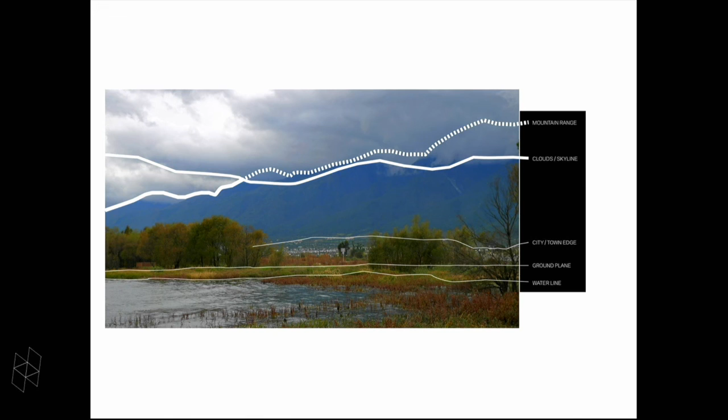So our form is definitely inspired by nature. You always see a lot of beautiful mountain, lake, wetland landscape—it's really hard to get a single straight line, except where mountain and water meet, that's the horizon line, right? So even their buildings are small scale and never have a straight line. This kind of thing starts to generate our design.

Definitely it's not a big idea. From this diagram, you can clearly know what we really want to achieve. The theater is only part of this program.

For normal design, since this is a theater, normally people make almost the entire building theater except the lobby. But we leave maybe 60%, even more, providing outdoor space, amphitheater, plaza.

This is the Kong idea. We give the flexibility, we give the space, which sounds like nothing, but it turns out to play a very important role for this architecture. We also go back to very primitive typologies, like transparent space, nest or cave, for the performance space.

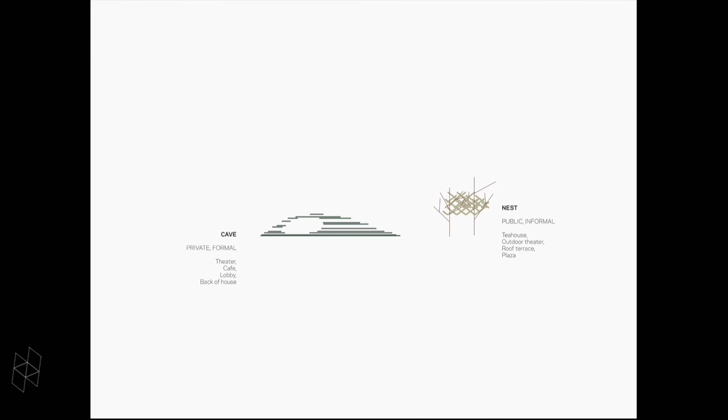We also create a very interesting transformation, both of nature and the cave-nest idea, into the roofscape. We create a big canopy, you can see. The local weather is so beautiful.

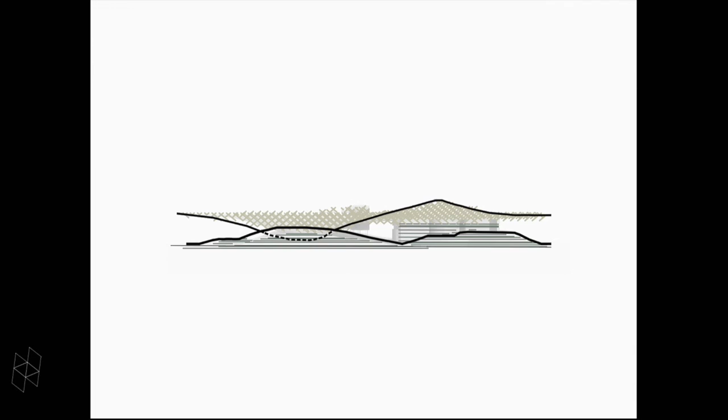This is a highland. It's never too hot in summer, never cold in winter. So most people stay outdoor. This perfect climate actually generates the people's lifestyle, the locals' life.

So you can see the big roof, but this roof somehow works both ways. First, providing shading in summer, protecting from the rain so people can stay here. Secondly, there's a huge tension between the lower ground and the sky.

So even people can unconsciously walk from here to the roof. It just makes landscape and architecture really integrate, even the performance—this indoor space with an open skylight, a big skylight.

That's not what a traditional theater space is supposed to do, but we want to give something experimental. Sometimes if there's no performance inside, it can be very interesting—you're going to look at the sky, mountain, the cloud, etc.

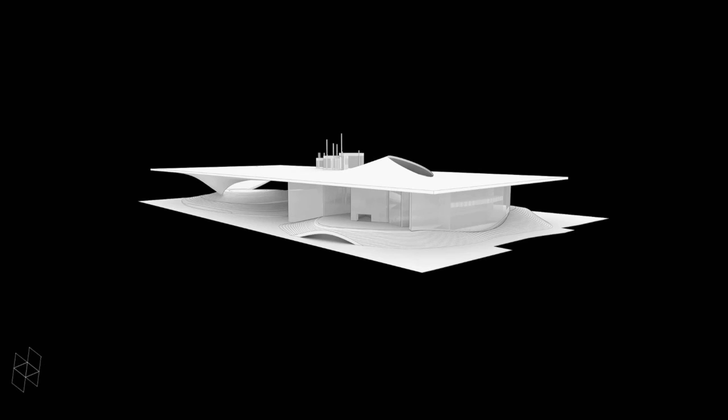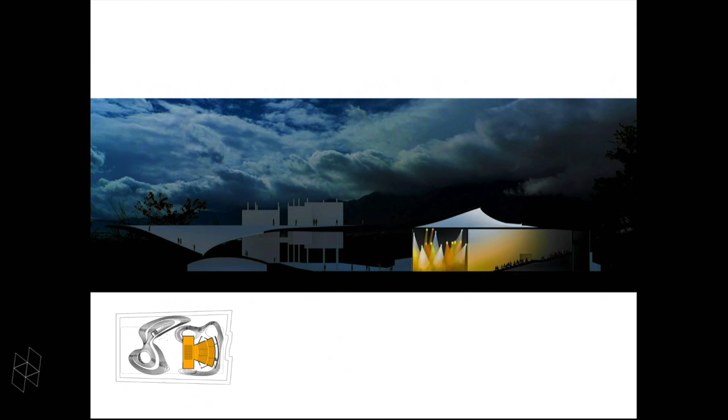So this model shows the two volumes, right? One is attached to the landscape, at ground level. One pops out, more like a mountain. These ideas try to create a lot of interesting tension between the buildings.

This is a normal theater, right? If we don't have the rest of the space, that's perfect for the performance. Definitely we're providing another possibility.

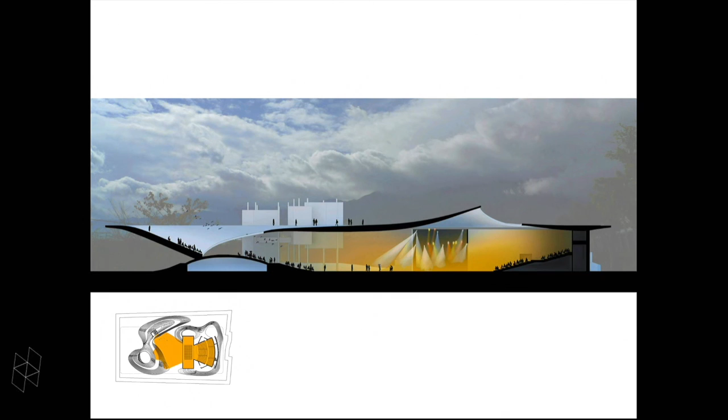The stage, the recent stage, is located on this side. We can also share it, turn it another way. Definitely you can separate it. This is exactly what we really want to achieve—bringing the performance to the outdoor, to the Kong space. This space exactly translates the meaning, right? I just mentioned the Tao, and it's actually really meaningful.

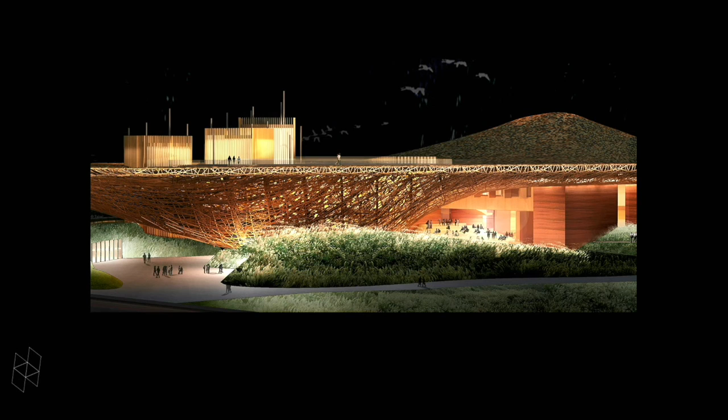We further studied the material, the architecture form generated by nature—kind of contemporary, but the material we used is local. Even this wall, we use rammed earth walls and also wood. We encourage the building's transparency.

We also made some bird houses. People can easily take the elevator from here to get on the roof, or walk down through the amphitheater here. Even birds can be concentrated in this building.

Next, I also invited the Chinese artist Cai Guoqiang. His work is inspired by gunpowder, one of the great inventions from Asia, China. He blows gunpowder onto the wall, and it becomes a painting—sometimes on the ceiling, sometimes on the floor. For Pudong, he made the sky, the whole landscape, just for maybe a few seconds before it disappears. He also made an interesting work in New York.

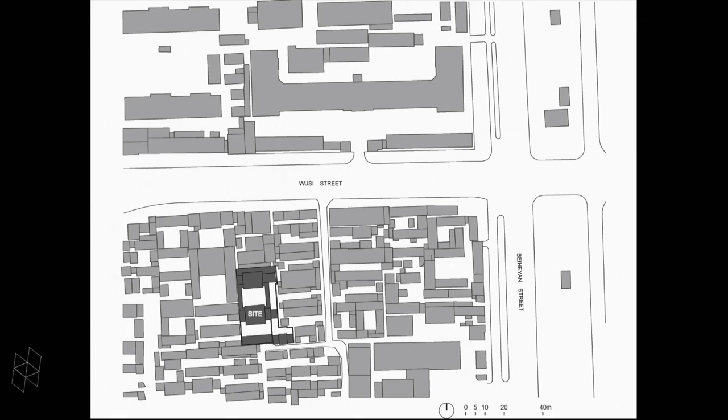This is both his studio and private house, located in the center of Beijing, very close to the Forbidden City. This is a hutong. Maybe most people have this experience.

I won't talk much. Our idea is how we can introduce the new to dialogue with the old. We also made a huge effort to preserve—by preserve I mean I'm not trying to interpret anything. The old is old, so we just keep that, and then that's the new.

The two courtyards play a really significant role. This is a kong space, a courtyard space, but a lot of activity is going to start from there. Three buildings—I gave them 3 characters, 3 themes.

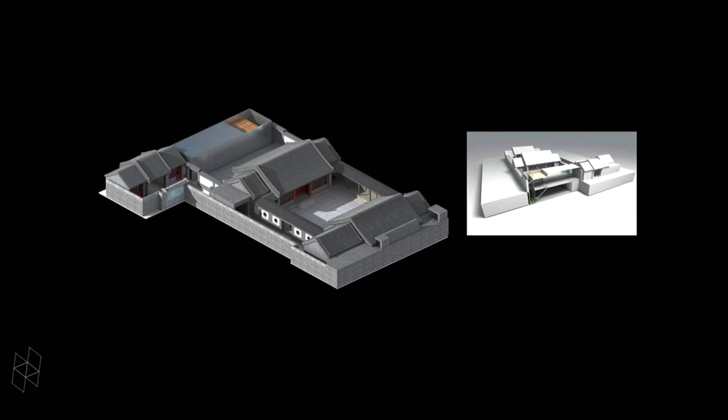This one has more of a futurism idea, kind of minimal, for the studio. The second room is inspired by painting, just two-dimensional—you can see in the next slide. And the third room has more of a three-dimensional, layered feel. So this is the important thinking behind it.

First of all, we really respect the existing structure, even where we tear down a piece, because this happened during the 1976 Beijing earthquake. Even though I was in middle school, I remember a lot of the courtyard houses falling apart, cracking, and people building temporary structures. So we really respect this and keep this symbolic form.

In another way, this container box also translates from the courtyard house. If you think about a typical Chinese courtyard house, they normally use 3 bays to create 1 room, then arrange the rooms to make a courtyard, creating a very complicated configuration to fit different sides and situations. If we ignore the pitched roof, that's essentially this room. So we believe this is a fundamental typology.

The material here, like I said, is attitude, but we don't go back to tradition—we bridge both tradition and the vernacular. We don't use brick and local material; here we use more reflective materials to dialogue with the old building. You have reflection, the sky, landscape. That's exactly the Kong concept, the attitude we're talking about.

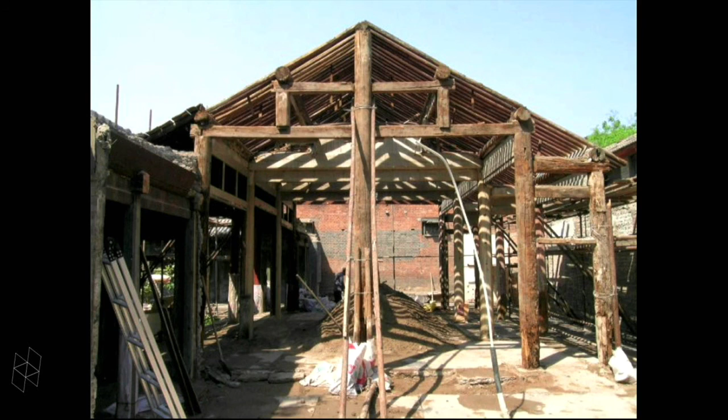Even those columns, we didn't repaint or replace with new columns. This is a construction site—we use a very traditional Chinese way. We never take this off; we only cut this piece out, like surgery. That's the really traditional way.

You can see, I don't know if the slide is clear—this is the way we cut the piece of the column out, since the column had already declined.

This layer we add brings natural light in. We can also read the texture—this used to be the courtyard wall, this is the room wall. We get another space by giving it a skylight, so it just keeps the memory and also the transition.

You can see the brick size and brick colors that represent the different periods in Chinese history, from the Qing Dynasty, through the Republic, until today.

The concrete also gives a little bit of scale, so the light can reflect. So this is a courtyard. This I won't see much.

When Cai Guoqiang and I first worked in his courtyard, the situation was like this—it was really hard to stay. The wall was almost falling down, but we made the renovation. So this image shows from the room looking out to the courtyard.

Most of the dinners happen in the summer, especially during Olympic time, since Cai Guoqiang was one of the curators for the opening ceremony. Zhang Yimou and a lot of artists always eat here.

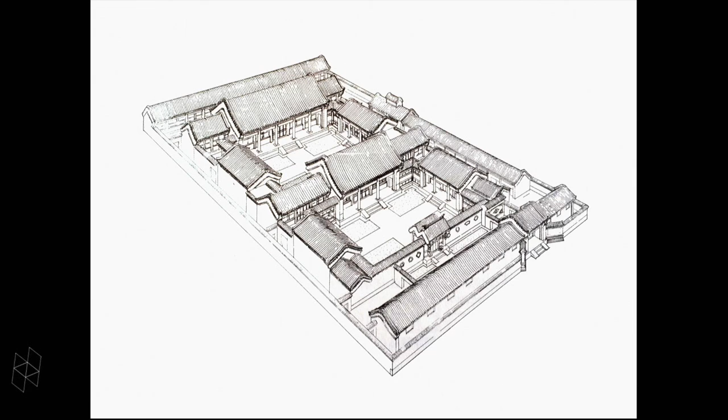It's not just based on Chinese hierarchy or culture—it's more fundamental than that. If you go further south, the courtyard gets smaller because of the hot weather. That's a very basic question, but architects always forget these things.

Chinese architects always have to face the challenge of tradition—5,000 years of civilization, and you have to face that tradition. But what is the meaning of tradition? Most people only pay attention to heritage, physical style, material, etc. But actually, Chinese tradition has another strong tradition which is more spiritual.

Some people say Chinese culture is a culture of art, and I strongly believe this is really true. Even small things, my parents forced me to practice calligraphy, painting, etc. Confucius talked about the Chinese life circle—he said start from poetry, then ethics, then successful in music. From the beginning to the end of people's life is art. So I believe this is a kind of tradition.

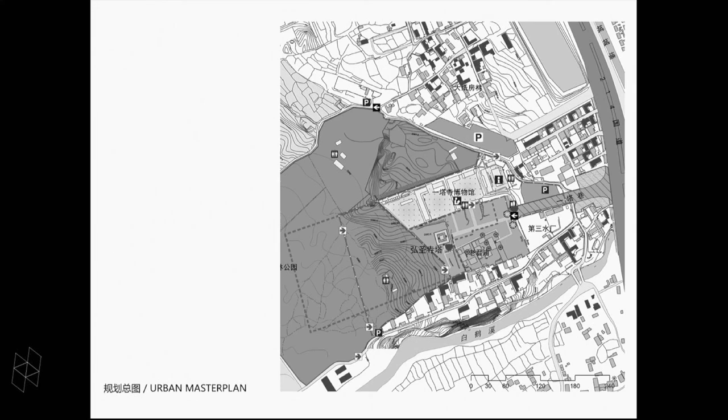Another project is the Contemporary Art Museum, going back to Dali. The performance space is here, and the Dali Museum is here—I want to save time. That's the side adjacent to the historical heritage, the Tang Dynasty pagoda with a little temple, and this is our side. The idea here is similar—a kind of Confucian attitude to hide this building, conceal this building, while definitely generating this building.

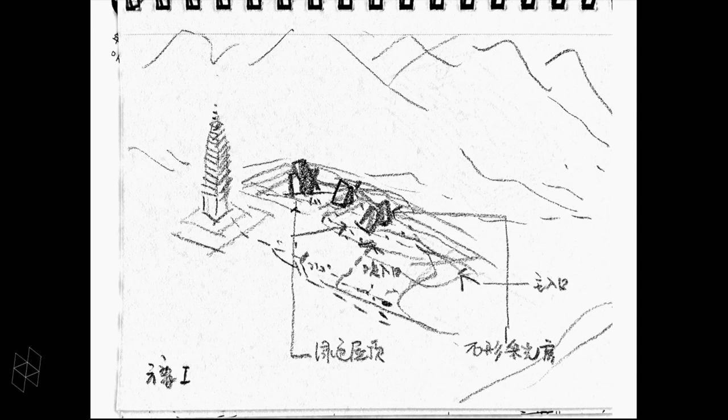That's actually transformed from this image—it shows most of it, but this is not important, actually what's underneath is important. So they created a kind of poetic landscape—it's more Chinese thinking in terms of an abstract way. Then this sketch gets clearer—that's the museum, maybe the vertical gallery for example, and most of the museum is underneath this ocean.

So you can see that's it. I'm talking about three rocks, right? So the three things surrounding here - this is the old temple pagoda from Tang Dynasty.

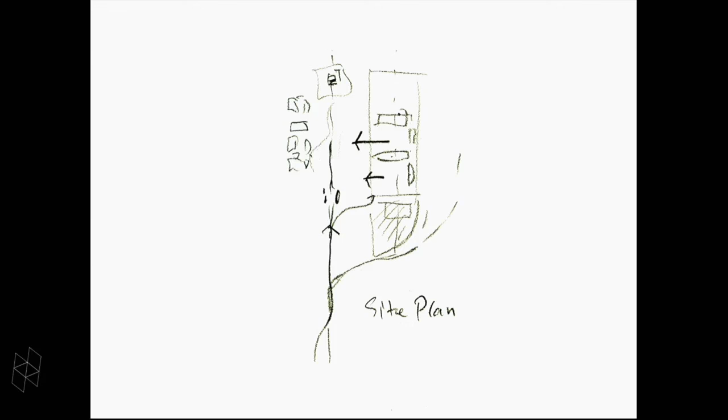This is our museum, so we try to generate together. We leave the big open space in between and keep the existing path. Basically this part we don't try to do anything.

I just try to bring the people from the roof. They can go to this level, and then from this level they can go down. Based on this site plan, you can get a sense about the scale - it's very close to the courtyard.

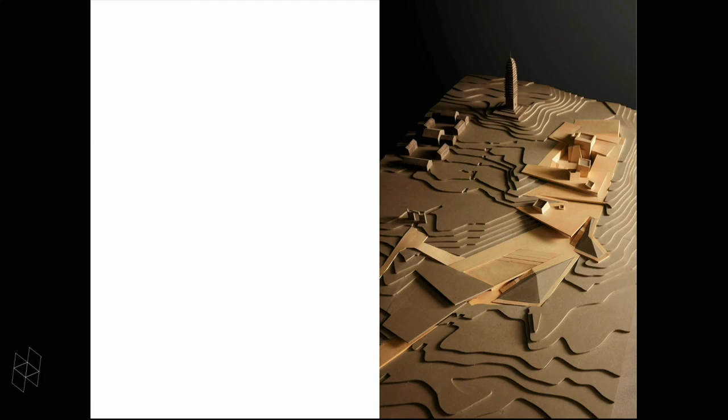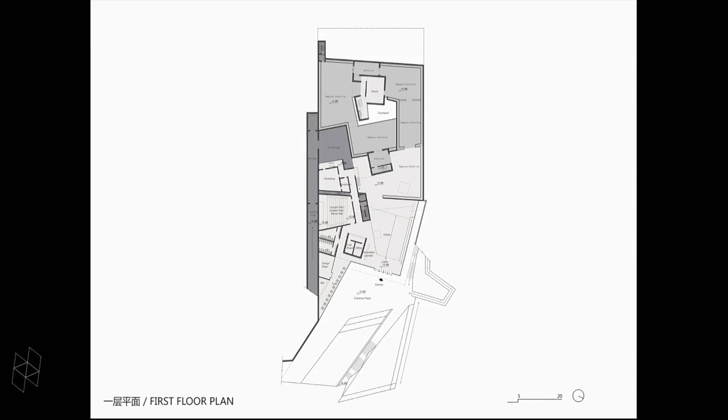This is a small museum, temporary and permanent, above the landscape. We have the observation on the top - this is a beautiful view. You can look down at the ocean, Old Town, and look back at the 4,000 meter tall mountain, Cangshan, a stone mountain.

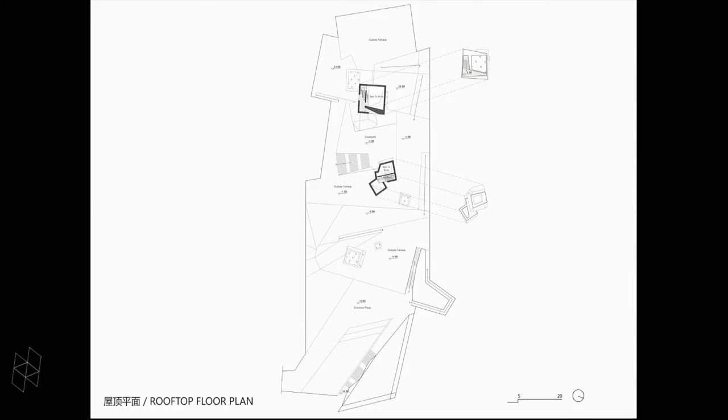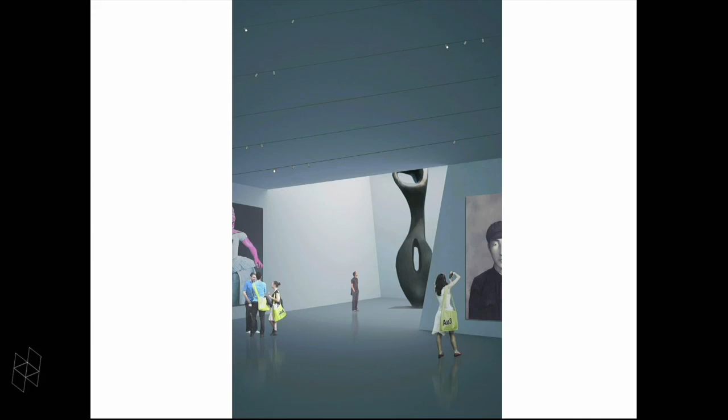Even those galleries still feel intimate in terms of scale. We also try to break up some of the normal gallery ideas - this is double level, people can look up, you also can look down, and you also have the chance to look through the skylight, the clear sky, to see the cloud, mountain, etc. It has a strong dialogue with nature.

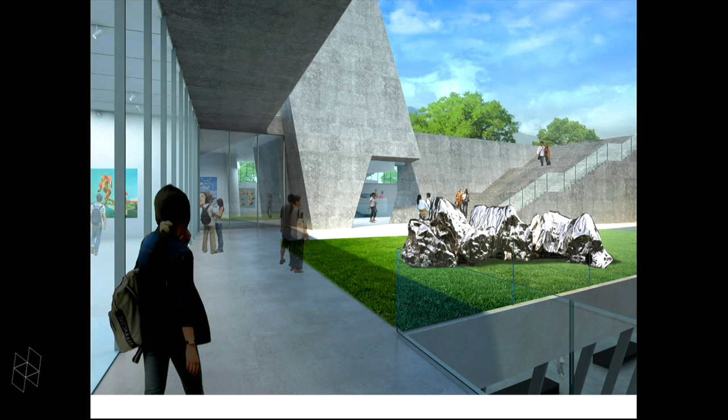The courtyard, once again, many courtyards - this one, another one, to bring the light, bring the activity, using cones. This idea generates a lot of activity in this blank space. Vertical, top has the observation, typical...

Those kinds of the museum - I'm not going to further talk about the technical part of the museum. The museum has a lot of knowledge about what a future museum is.

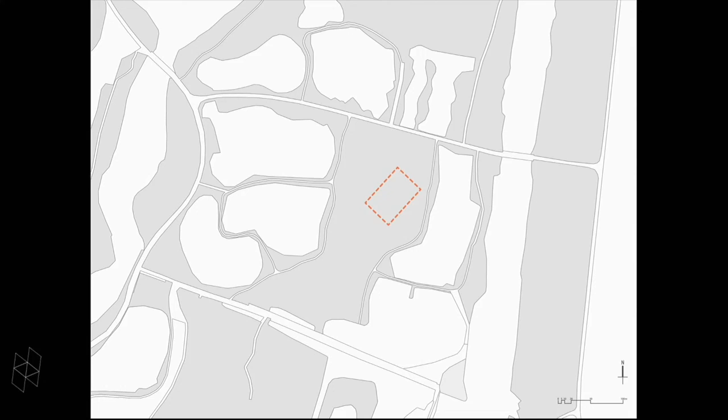A similar project we just finished last month, just a very preliminary conceptual design for creating a Wetland Museum in Shandong province. This is our site.

I would like to create the museum more like an experience installation rather than a real museum. Currently a lot of museums are just like classrooms, right? You're reading so many science things, but I would like to create some experience.

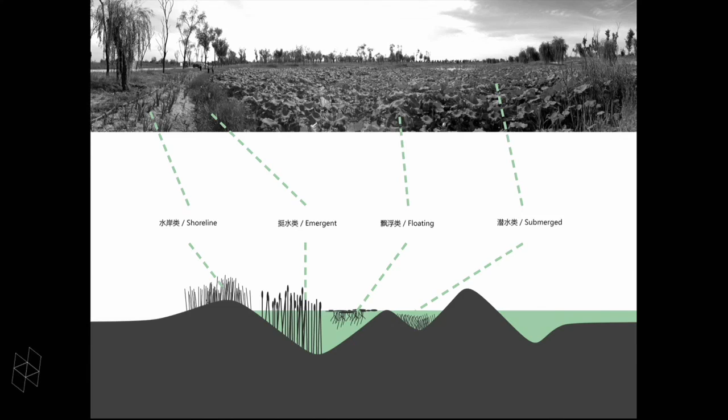This section is where we start from - very interesting. So you know about the wetland, but you never know what is underneath. This is our section, we start from here.

And then people going to be unconscious, walking in and out of this little museum. We try to create a really small scale in terms of building height - it's not based on a museum like this.

Really give the attention, give the wetland the experience. So that section shows how we make this work, interior.

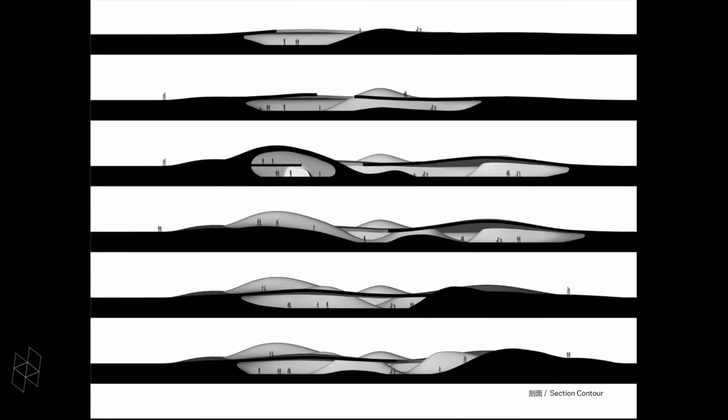Yeah, this is a really initial, preliminary design. Yeah, so for most of the projects, I only showed the first part, how I translate some inspiration, some idea into the conceptual level.

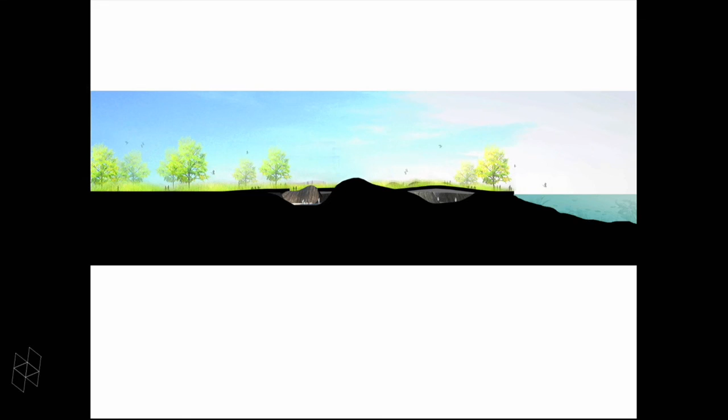But one project is going to prove we can make high quality architecture as well. So this is the section, right? That's like the diagram, the first diagram I showed you guys.

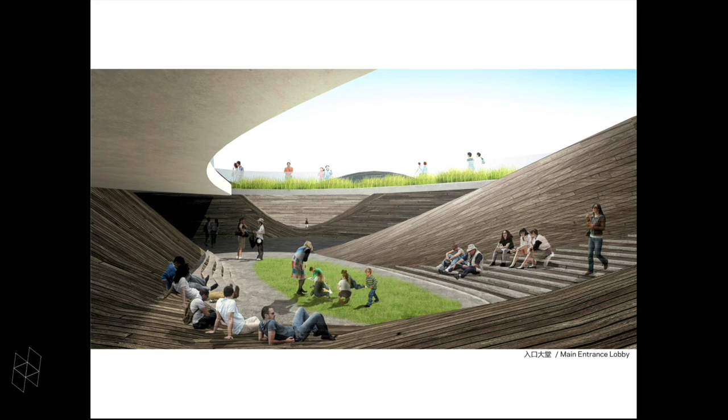It's more like a wetland, underneath is another world. This experience is almost not like education, not like school and typical museum things - no collection here. We're just providing the people hands-on experience, the shading, etc.

Next one is going to really contrast with this small museum. That's in Tibet.

Tibet, the most highland in the world, right? I always consider it's so far away from my mind. Even though if I fly from Beijing to Tibet, it only takes about 4 hours, shorter than the flight here, I still consider this really far from myself. Maybe that's because it's so unique. This nature is so unique. Religion is so special. It's the most of the highland, right?

Even in Tibet, the Lhasa ground is 4,000 meters tall. The Dali mountain's peak is 4,000. Beijing is only a few hundred meters for the most, for its tallest mountain.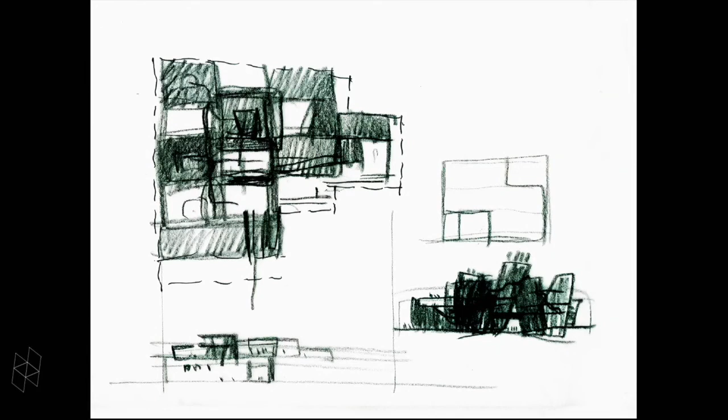So I start to sketch—it's really far away from our design, but they show my experience. I try to catch up the sense of the primitive experience in Tibet. I just feel this place is really like original human beings, kind of a nature-dominated people, so culture so primitive.

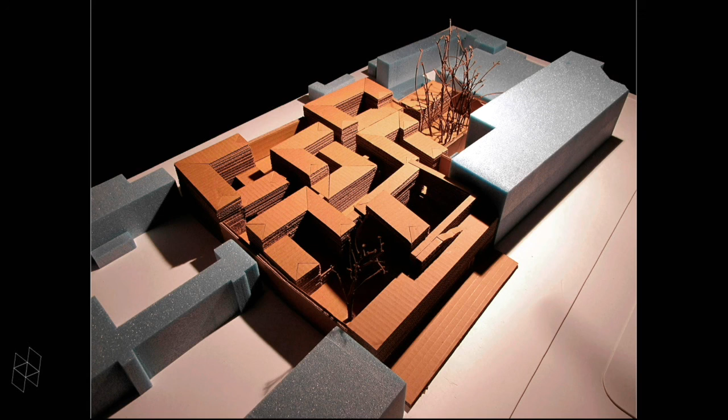So this is kind of rough, never having any decoration like the Chinese center area and the beautiful curving roof—never happened here. Even though they have a lot of water, rain, but they want to sow, so they have to make a terrace. So we start to transform the primitive typology into our building, many courtyards, just different scale.

The front part is more cultural museum. The center part is like lecture and meeting room, and the surrounding part is more like hotel rooms. We also considered local Tibet medicine—they consider the whole world is formed by the earth, the water, air, fire, intangible—and we transfer that into the more spatial courtyard to give the sense of that idea.

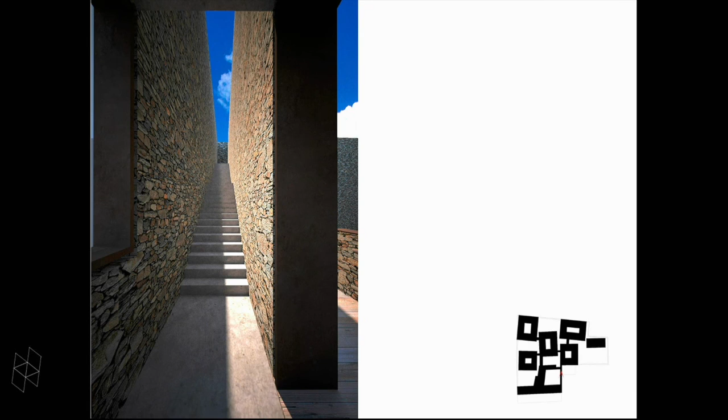This is the first courtyard, more like their courtyard, just getting a little bit bigger scale. So cars and people can walk in, turn around, and then walk into the reception lobby, public cafe. We also have—if you've been to Lhasa, doesn't matter if it's their palace or their local small courtyard room—

they always create a lot of stairs like this, at an angle like, I don't know, 70 degrees, like you're climbing a mountain. I don't think this is because they didn't know how to make a stair like this—they feel comfortable. I think that's the religion.

That's in their mind. They have some religion talking about sky ladders, right? Talking about one of their philosophies—people come from the sky, and then you're going to make good for the people, and then you go back. You have the ladder to connect heaven and earth.

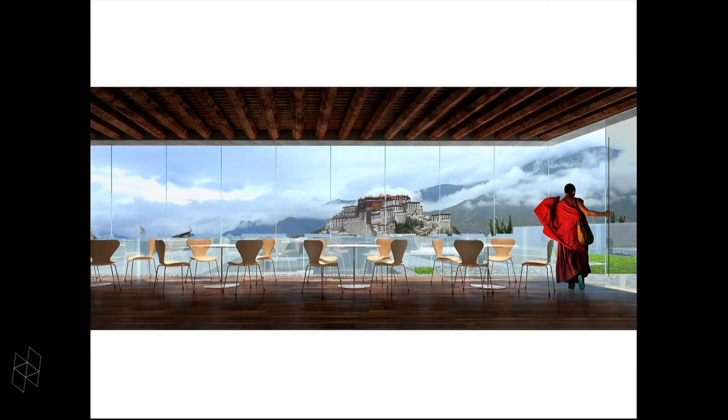So this is not far away—you see the Potala Palace. It's kind of rough, the character. We use concrete structures, that's for sure. Some metal for making things, since the material can't deliver or stay on its own, we have to rely on metal and concrete.

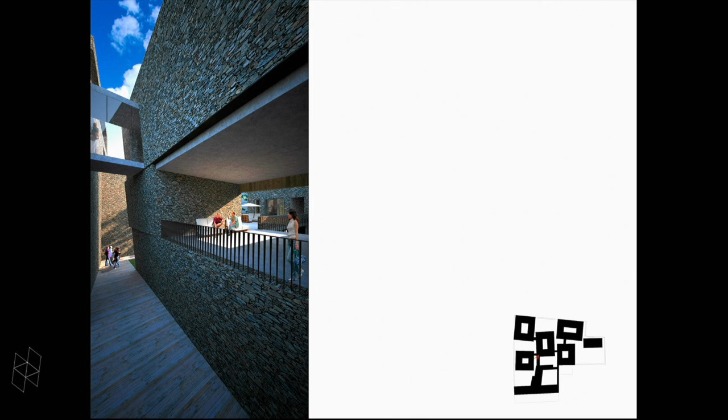But the building typology for sure is local. The building material is kind of local. But the overall configuration, you also feel a very contemporary way, like those detail glass, kind of minimum wood, where even the wood has no more detail, just like what they did locally—those kind of primitive and rough.

Many different courtyards relate to each other, from the alley to the courtyard, and you can also dialogue from the terrace. This is a local building designed to catch the sun, with small alleys providing shading in the summer.

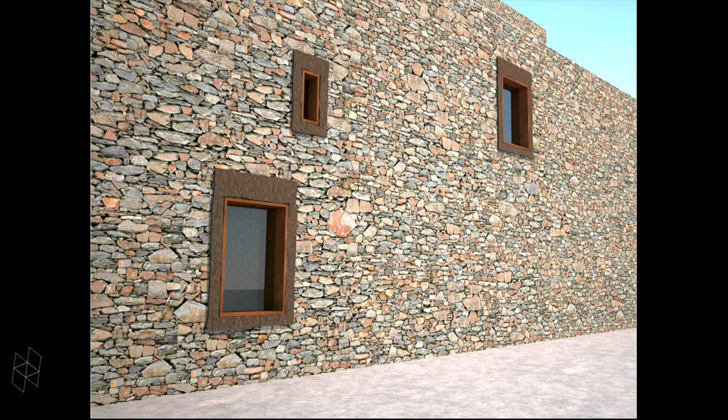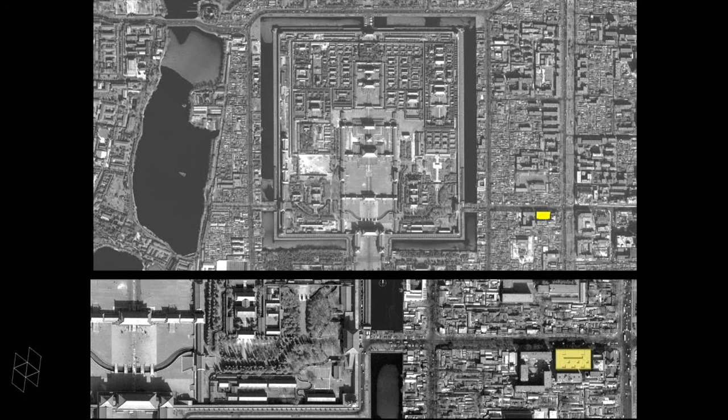Next one goes back to 2005, my studio's first project. It's not a brand new project, but a renovation of an existing structure into a hotel. Maybe that's the only commercial building I've done, but I translated this hotel into an interesting concept. This location was a very important existing structure, abandoned for 2 or 3 years, nobody really cared. I call this an urban tumor - we need to make surgery.

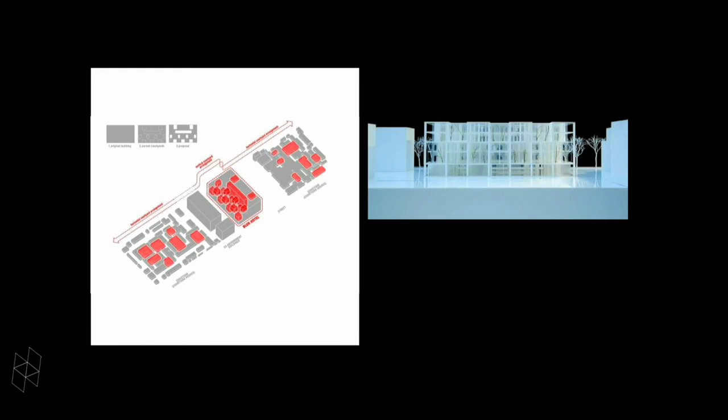This is from the Forbidden City courtyard house. The first idea is to transform the local courtyard scale, the configuration in the vertical - that's also Kong's idea. We enforce this building style to dialogue with the surrounding. They're not solid blocks anymore, they're getting more transparency. I was shocked when I went to the construction site - the whole building, just...

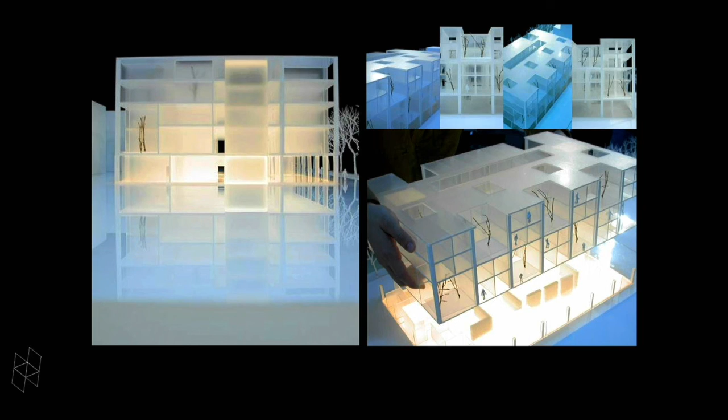Really tough. I cut this whole box - I don't know how many courtyards - I just carved out so many courtyards. But the beautiful experience is that no matter which room you go to, you must go through their major Kong courtyard, and then each room has its own courtyard or shares one with somebody else.

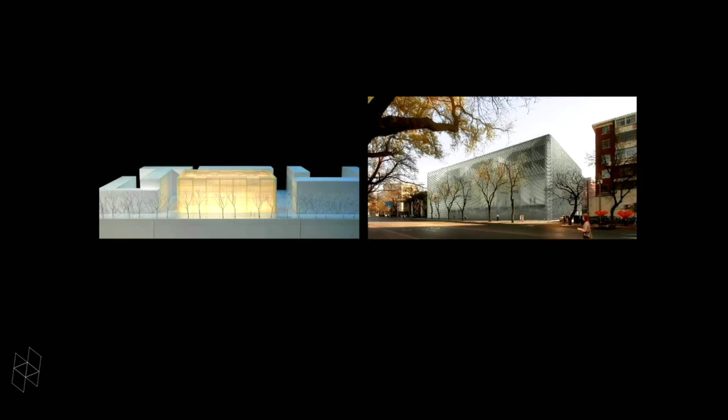The material, the building, is very abstract, very minimal. It's contemporary, but minimal in terms of the architectural form. This is a material we developed, working with a manufacturer. But the reality is very difficult.

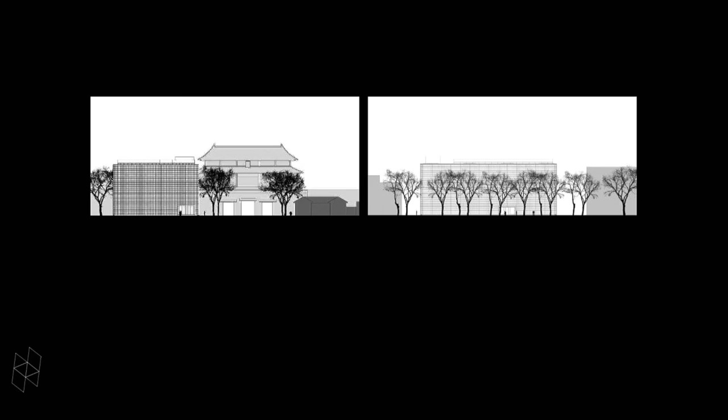The manufacturer was kicked out during the bidding time, and the new contractor didn't know how to do it. The previous manufacturer we worked with for half a year wasn't willing to give away the secret about how to make this translucent material. So we had to rely on others, but the main concept still remained.

The big courtyard is the big idea. This image was published in the New York Times. One article talked about how, like what I'm discussing today, the contemporary is inspired by tradition, the neighborhood.

Since this project, I started to think about the contemporary way we transform traditional courtyard buildings, using empty space like a Kong - nothing - bringing everything in to give the architecture more life, more respect, like Chinese painting did.

We develop, we also work with artists. So I designed the lighting, like a sky - hopefully they have stars right now, at least maybe in 2005 it's okay. So we bring the stars from the sky into the major courtyard, small courtyard, etc.

This idea was developed further. We just started construction recently on a cultural center on the boundary of Beijing, the west side, at the bottom of the mountain. This region used to be a big steel factory. Shougang is a really generic city, nothing interesting, except that they have a beautiful background - the mountain.

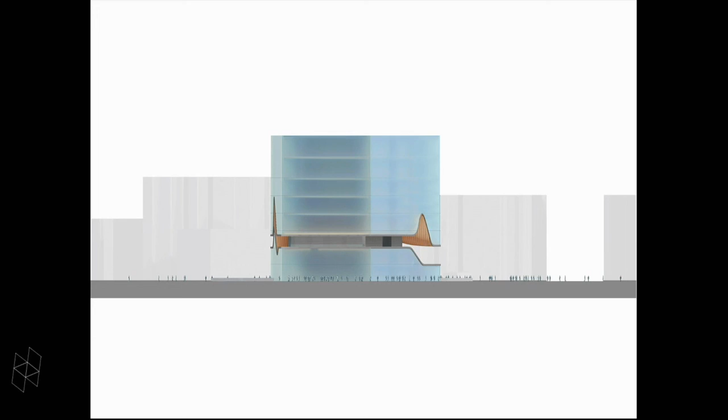So I recreate this kind of thing - this Kong space, once again starting to show the natural stone and transforming it into our building. So this is the kind of closeness we want - really minimal in terms of materiality. Just use U-shaped glass, and only create this cut, which we call the empty space. But because of this space, it generates all the program. For example, when I made a presentation for them, they always think about image.

They say, okay, that mountain, that's great, nature, that's great. But when they take further consideration, they said, "Hey, we probably have a problem. If I enclose it with glass, that's the area—you create a really stupid space. Maybe we invest money without any return."

But I explained to them, because this space actually makes the whole program become life. That's exactly Kong's idea. So, for example,

if you have a concert here, you generate your concert hall, your theater, to outdoor. If you play a movie, that's your movie—nighttime, showing the people. If you have some exhibition here, that's the museum part. So they never waste space, and also they can provide interesting possibilities for all the people. Doesn't matter where you go, which program you plan to go, you have the chance to brace, to meet people, to communicate.

I think this is perfect—it makes a statement to the public: here is a cultural place, please come. We have the movie, we have the sculpture, we have the exhibition, like an urban stage, etc. After I explained this, they definitely accepted this design.

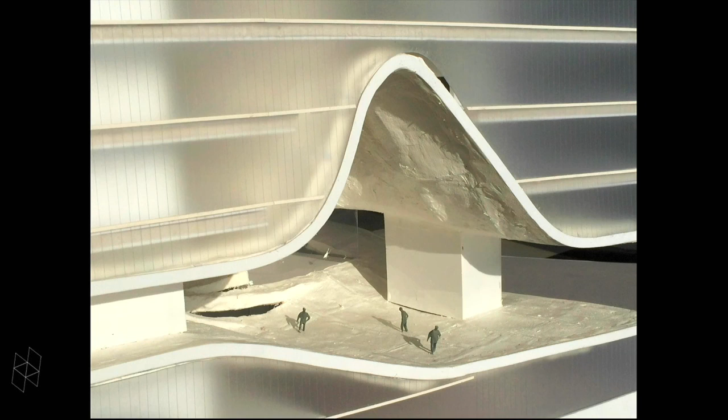So we continued to develop this design—maybe more like a performance scenario. We also created a chimney to bring the hot air from inside, also providing light for here and there. So that can be really interesting. Once again, Kong became significant to stimulate this architecture into more life.

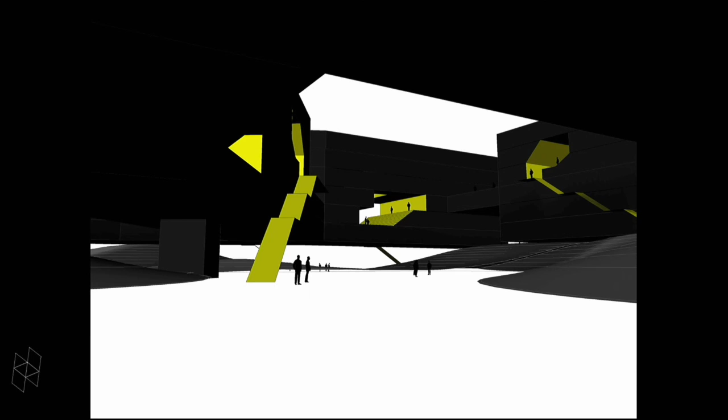We found, just really quick, this Kong idea continues to apply to the design we're working on right now. It's really preliminary, conceptual level. First of all, you can see this dorm, the student dorm. They left the ground level, and then they give the public transparency in the back, and all the landscape can flow into the inside courtyard.

Secondly, we gave the building some outdoor space to continue to reinforce activity. And then finally, we enclosed this building again—the big courtyard gives you a sort of sense. So for example, the future dorm is maybe the lecture hall, amphitheater, music, even a lower deck.

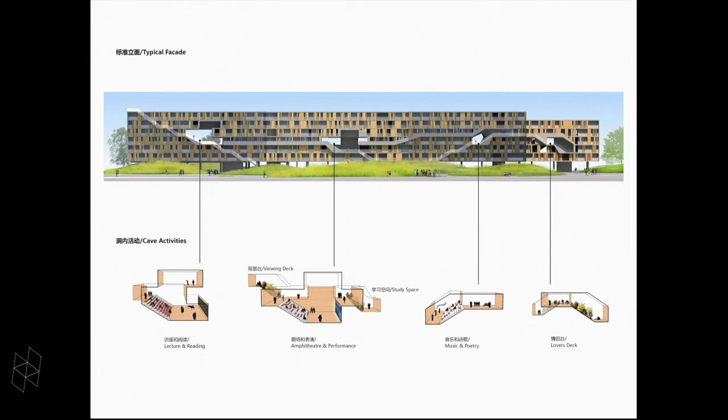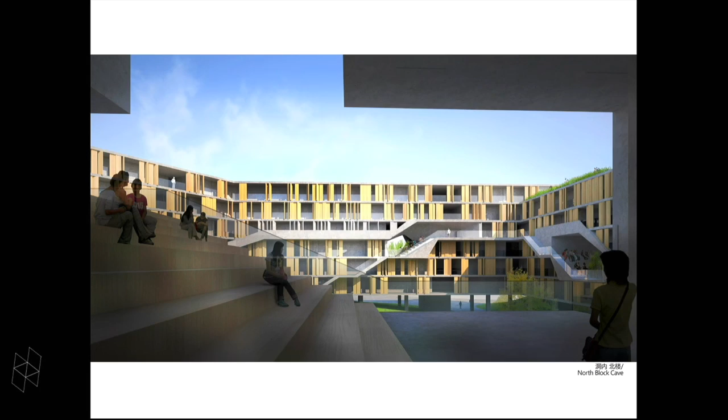The future dorm can be changed, right? Maybe the library in the campus future, or maybe no classroom, I don't know. Based on this, we continue to create those things.

So the big courtyard, for example—definitely right now the facade we totally changed. The more minimal one was too generic, so right now I like the current facade.

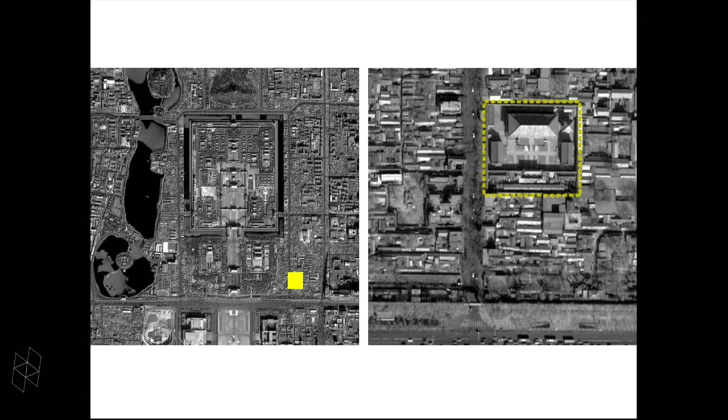Maybe very quick, I'm going to jump to the next—the courtyard. I was invited by the Guggenheim Foundation to try to make a Guggenheim Museum here. So I won't go into detail, but the concept is exactly the same as Cai Guoqiang's idea.

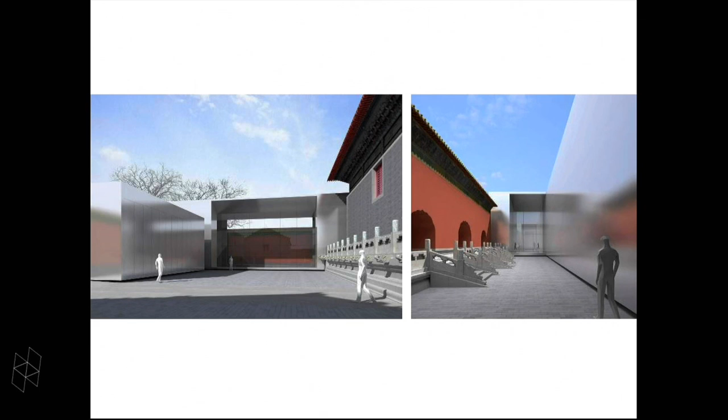We try to make our building in another way dialogue with the historical building. It's not just, okay, here I do nothing, or I have to make everything underground, or use exactly the same form and material to do that. So here we try to really make a dialogue. I'm not trying to repeat what you already know—the Cai Guoqiang typology, material, dialogue—the building tends to disappear. So invisible museum is the overall concept.

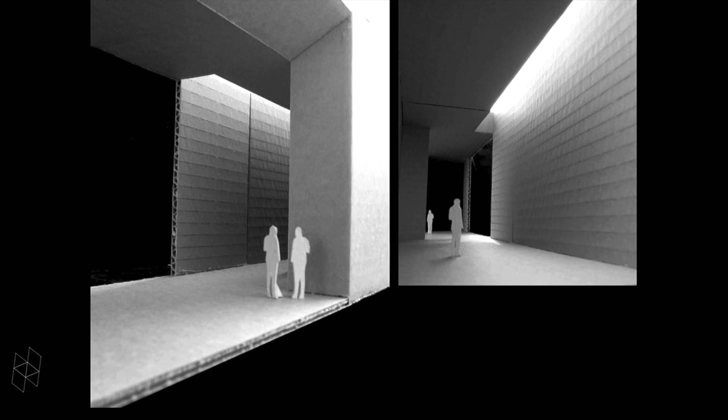That's another way—definitely this building is temporary, no foundation. It's really light, like a container, they can even move it in. So this was the idea, but we never realized it. And then at Guggenheim, people like the former director resigned from his position, but we continue to try this one right now.

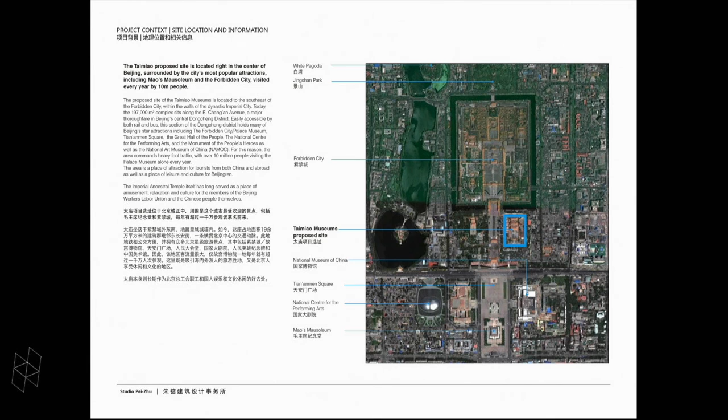But fortunately, this one we started—we make a renovation as the first step. This is even bigger—this is the imperial temple, starting from the Ming Dynasty.

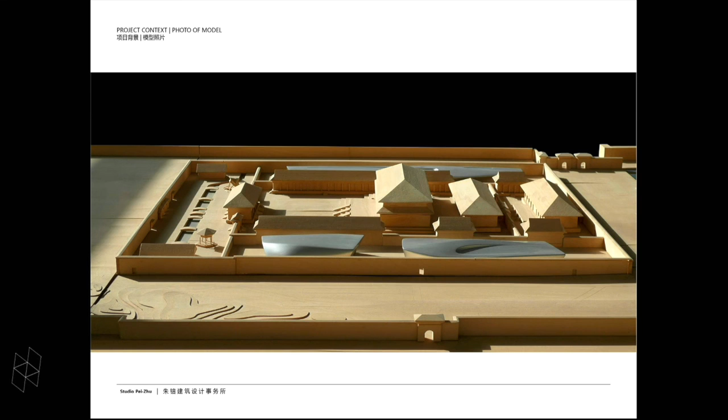Very interesting idea. Maybe through this model you can see we have two steps. The first is to preserve those buildings, transforming the interior space in a minimal way into contemporary museum, art museum space. The second phase, we also use the same idea as the Guggenheim Museum Beijing—it's a kind of temporary structure.

This structure is the biggest wood structure—I don't know if in the world, but for sure in China, this is bigger than the Taihe Temple in the Forbidden City. There's a very sensitivity about Chinese cultural things.

This is his father, right? This is an emperor. So they made it bigger, wider, horizontal, but lower. But he was taller, but smaller. So this is very interesting.

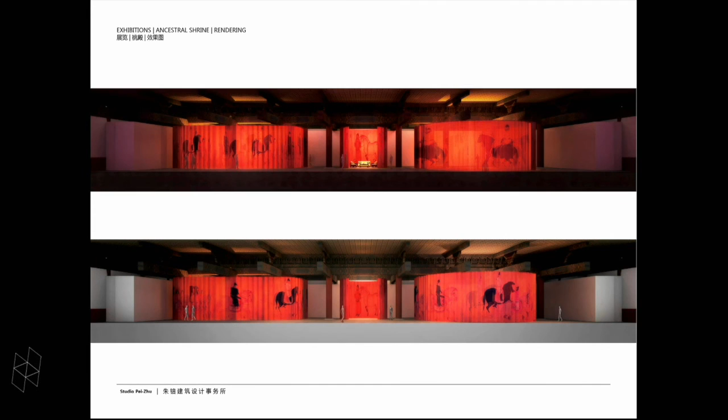I don't know how they transformed those silk wood from Nepal into here—it's really original. But most of the Forbidden City, at least the Taihe Temple, burned down two times during the Qing Dynasty. And then we convert different temples into different uses, but everything is temporary—just a curtain can disappear like this.

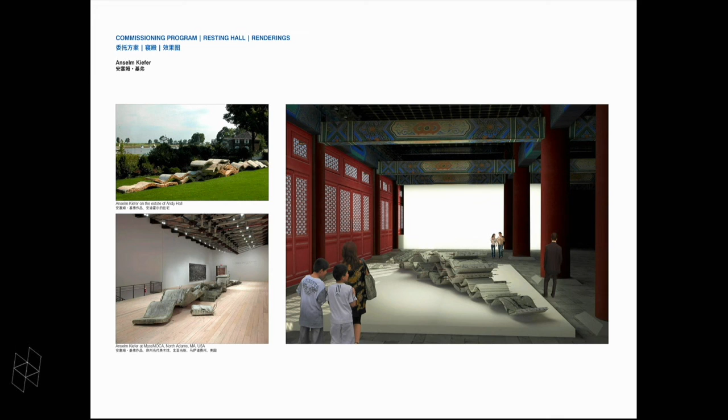We also cooperate with Anselm Kiefer, some artists, working together to try how we can translate this historical building into the contemporary. This is a construction, and then this one is done. Currently, we finished maybe 90% of the temple, and the first phase is going to be open to public during this May.

The Minsheng Art Museum, I have made a lot of renovation into the museum. First one is Pace Museum. We finished a few years ago, maybe like 2009, 2010, and this is the current museum. Right now I just signed a contract, right after I go back I'm going to work on the art center for 791. So three buildings maybe can be in dialogue.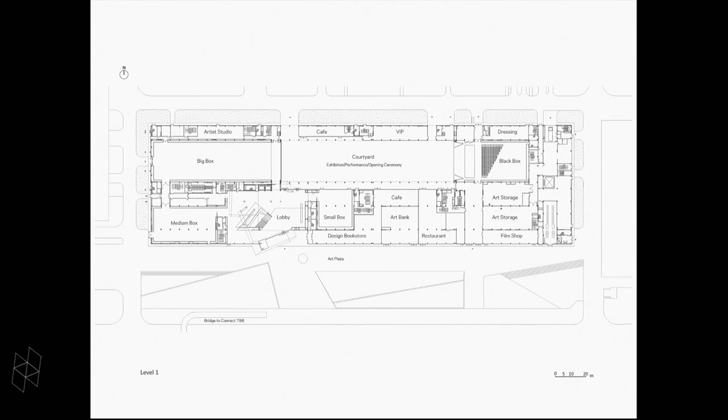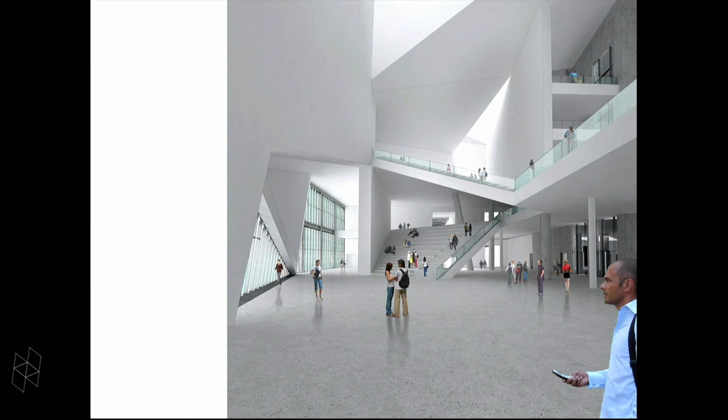I'm not trying to talk much, just to focus on the point, which is the industry building - we carve out a big courtyard space, which used to cover everything. And then we create one flexible, vertical, interesting space like this. We also try to develop some material. This is what we really try to do to make some public engagement - stairs became the theater seating, for example.

Really straightforward, very typical - the museum, perfect. But after you go through almost like a 150 long gallery you feel boring, so we end up creating some interesting space to give commissions to artists, where they can make the craziest things. The central courtyard can host a performance, a concert, but right now you also have like Richard Serra sculpture that can fit in the moving trail, providing the possibility to hang artwork.

This is the lecture hall, can open the door - this becomes the outdoor stage. And even inside this black box, we faced the difficulty of the industrial building having no budget to do any interior acoustic work. So I proposed some solutions.

The painting with fabric - when you slide the small percentage with the fabric curtain, the acoustic is going to change. That's flexible thinking, I think similar with what I'm talking about, the point in the beginning.

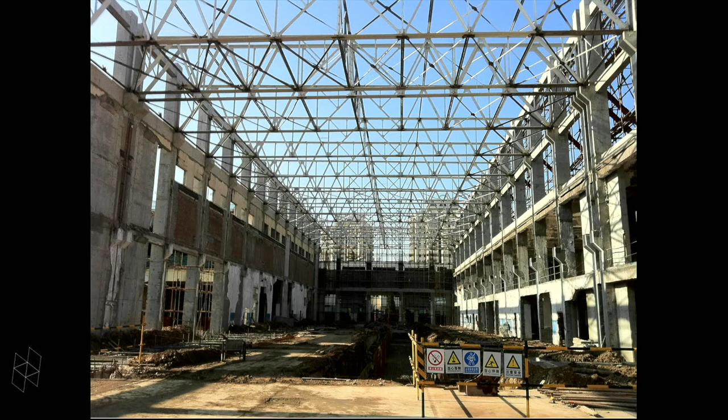This is the museum people. This is artist Anselm Kiefer, his consultant for the exhibition. We're working together during the museum construction. We discussed the details, the construction began, and now we've almost finished the most tough part.

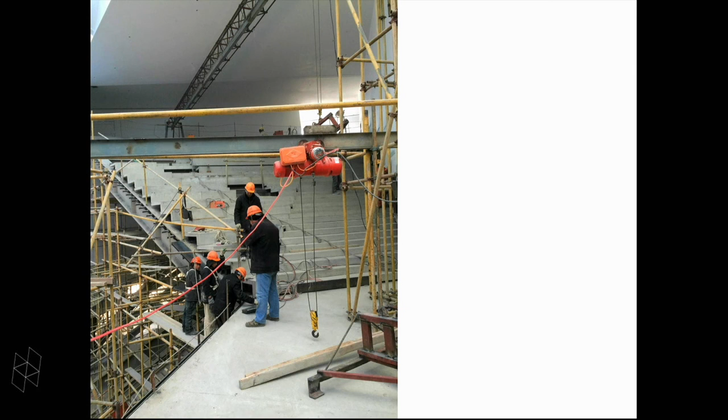The big amphitheater I mentioned too - this is precast concrete. It turned out, I feel very good, and at least at this moment I feel kind of optimistic about this quality.

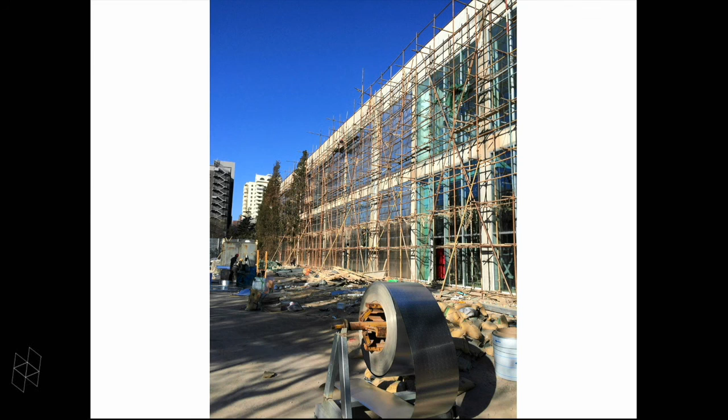The skylight - definitely our budget was cut dramatically because of the controversy of their leadership. And then this building was on hold for almost 2 years, and we had no budget. But I just used really temporary material.

This is really the building I like, since it's so minimal, so flexible, existing structure almost there - we only made new floors. That's perfect for the museum space, very naturally done. The quality of things - I only talk about it at the concept level, but this is one where we can show our capability. Actually, we can do a very good job in terms of construction.

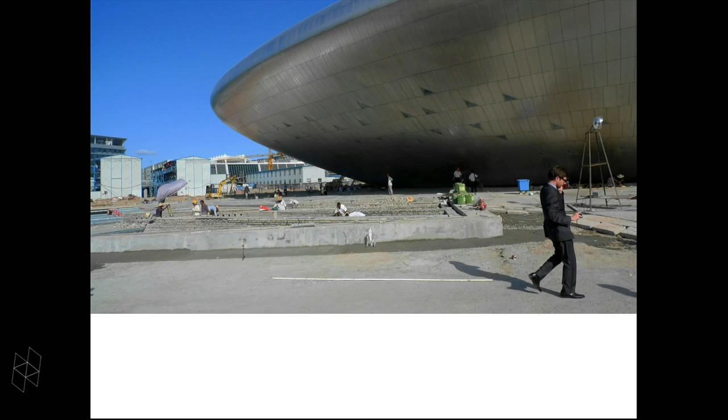We went through it with the curator. If you look at this quality during construction, that's more realistic.

Probably everybody knows I'm not Gehry - I don't have that money to build aluminum and titanium things. But we had to deal with very difficult stainless steel. Stainless steel is really hard to work with, too hard, too tough.

So we kept generating the building form in order to come out with a panel system - no double curving panels here. I remember we used at least 20, maybe less than 30 kinds of panels to achieve this overall enclosing form, even though it has a lot of curving form. Piece by piece, it's really enclosed. That was my first try.

I tried to put my idea out first, and then push construction to the limit to see how far we could go. But I wasn't able to go to the job site often - only a few times. I relied on construction documentation and the manufacturer's cooperation.

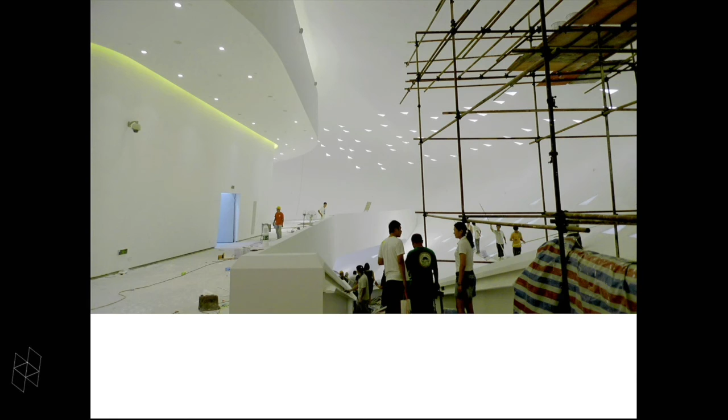Things were done so precisely with the construction documentation. We also had a really good, professional client - they knew what we wanted and didn't bother us. They gave us time. The manufacturer, too - I still keep working with them on a lot of buildings. For the interior, once construction people started, the curator jumped in to come up with ideas.

This is after we almost finished the interior space - kind of surreal, like a James Turrell installation. It totally overturns the traditional museum experience. You feel like you're somehow in the fog. That's very interesting, exactly like Chinese painting, exactly what I wanted to create - this kind of surreal feeling, like the building almost doesn't exist. You have a sense of imagination about the space beyond. This is really surreal, right?

This building is almost done, but the construction people live like this, in containers. I just find this image so interesting - these people, very interesting, funny.

Usually on a project I know the culture, the weather, everything, but this project was my first outside of China. The Guggenheim created a team inviting architects like Gehry, Jean Nouvel, Zaha, Tadao Ando, Norman Foster, etc., including this small pavilion by Greg Lynn and others - like young architects. I don't know if we're still young - we're over 50 now, but compared to those guys, maybe at least compared to this guy, we're still young. So this is our side.

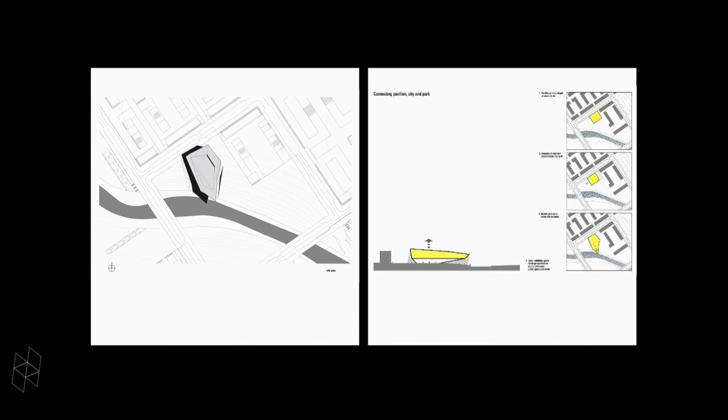So this is the exhibition. The concept - I knew nothing about the Abu Dhabi desert and had to figure out where to start. Basically I started from the climate and nature. I had seen a lot of Middle Eastern medieval towns, like they connect together, the valley providing shading, small courtyards, the roofs connecting. So that was the idea - creating underneath cone spaces providing social meeting space for the biennial pavilion.

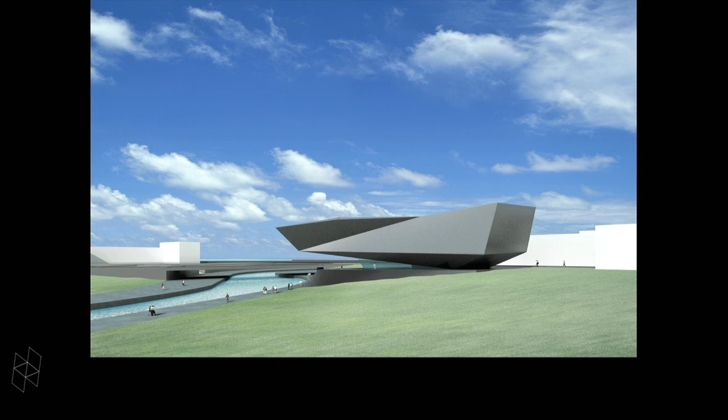Most people don't communicate inside this pavilion - they're on the roof, underneath the shading. This was my 2000 design, but I don't know when we can realize it because of the economy problem.

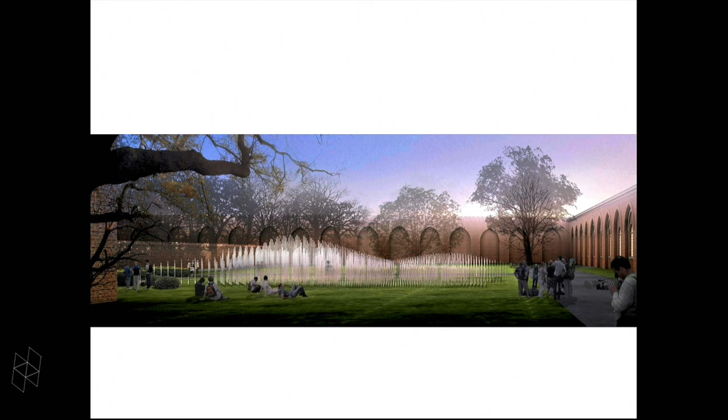Okay, I'm almost finished - just one more thing I'd really like to show. This is a Venice installation from 2010. I was inspired by Chinese poetry, especially the last two lines about a heavy river in the waves, thousands of bamboo. It's very interesting Chinese poetry.

I was struggling with how to make the installation in such an industrial environment, and in Venice, a place I didn't know. I tried to transform it - I felt that the way a poet makes poetry is similar to how an architect makes architecture, not like a painter. So I used ink to try to capture this formless, natural bamboo configuration.

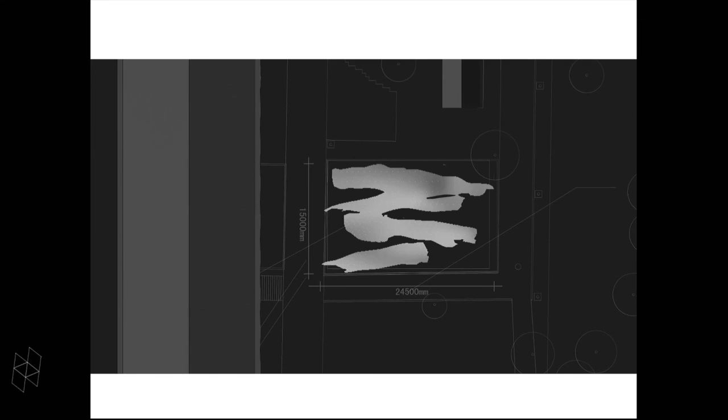We also try to make this installation really light, like fog. This is a construction, a very easy way: just a little pole pushed into the grass, and then we cover the stone. That's the installation.

Through this, you can see the river weaving, right? And then you see this kind of bamboo, formless, no form, but really open. You feel nothing, yet you feel very interesting. People like to walk in.

We also keep the dimension about each two rods. If you try to walk in, you have to push. And then it's like bamboo, they also create an interesting sound like bamboo.

At night, they have interesting light reflecting like people's breath. We control the light, up and down, and so all of this is inspired by nature. Definitely tradition too, right? So this is from the installation.

This installation, once again, I made another interpretation to represent the Chinese artist. I think this is like a Chinese artist exhibition in Basel, Switzerland. It's much bigger and more efficient, and it was done very quickly. That's the architecture installation.

This product, I worked with Swarovski. They wanted to create something based on the theme. They have to use their standard crystal product to make a creation.

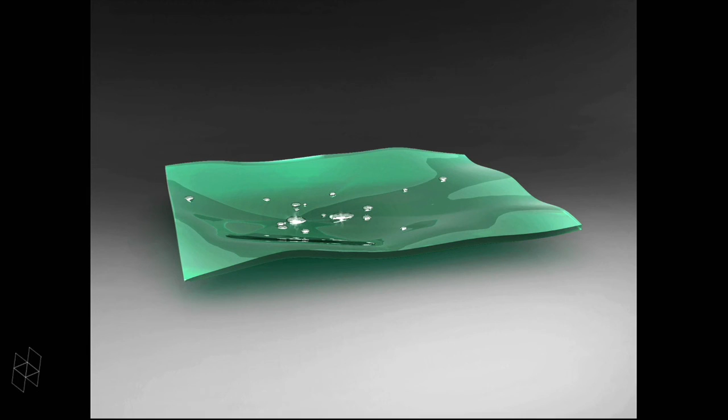So I was inspired here, but I'm not using exactly the specific shape. I cut a very rectangular shape and used it. Even though I felt that's not enough, we had to transform it again to make this glass.

That's the real product. They're like a water drop, right? And then you feel the lotus, maybe not. This is like water, you have the bubble. So all these things start to give people more imagination.

Let me tell you a story that happened recently. This summer I was invited by a jewelry company. They produce a lot of jewelry from Brazilian colored stones, very expensive stones. They asked me to come up with some ideas. I went to pick up a really valuable stone.

I just let it fall from level two and push it down. I did this twice, and then I picked up the pieces. Very interesting—this represents my idea, which is I want to use...

What does this stone want to be? They have their molecular structure. They have their fundamental things.

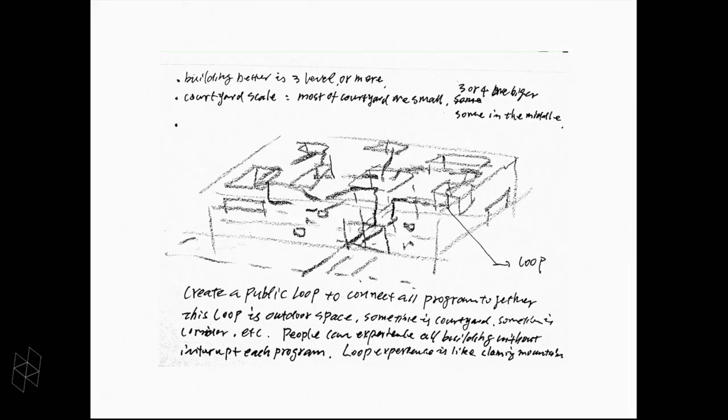Through the projects above, I'm not trying to make a conclusion. I just feel the future of Chinese architecture is not a simple interpretation of traditional Chinese architecture. It's not a form, it's not a style, not materiality, not a physical thing. Actually, we feel we have to find out more fundamental or basic architectural things, like why is architecture like this?

Why did nature create everything? Why tradition? What does real tradition mean? That's maybe what I really want to explain with my idea. Thank you very much for your attention. Thank you.

A little bit longer, right? You promised to be shorter. That's good, okay, so maybe there are a few questions.

I know we've gone through our question time, but yes, we have Neil.

Thanks for a fantastic lecture. Oh, very okay. See you again.

Very inspirational. But I guess there are two ways of thinking about how we learn from nature. Your way is very much about symbolism, representation, the forms of nature. There's another tradition about understanding the process of nature. Especially this week, since this is Frei Otto week—he both died and was awarded the Pritzker Prize. He had a different approach toward nature, continued here by Achim Menges and others, about learning from the processes of nature, not the forms, and transferring that into architecture. Is that something you'd ever entertain, or are you locked into the symbolic way of engaging with nature?